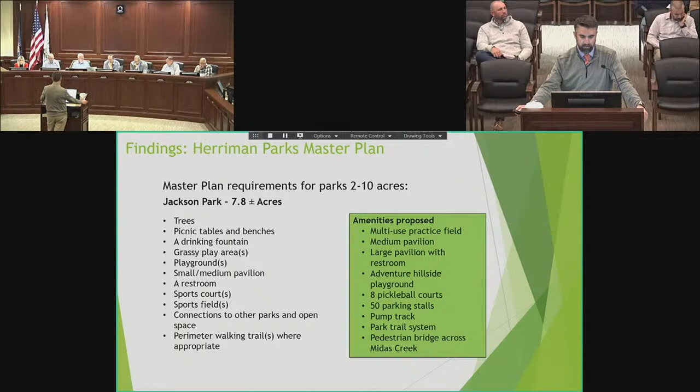As part of the master plan, there are requirements for parks given a certain acreage. All of these parks do meet those minimum requirements, and they probably exceed them a little bit as well. You can see the requirements on the left-hand side, and then the amenities in the green, fulfilling those requirements for Teton Ranch and Midas Creek as well.

So there was one topic of discussion just regarding the Jackson Park. Currently, it's providing 53 stalls, and the field that is there is currently only being proposed for a practice field and not for active games.

That is just based off of the problems that games can bring. If you have a field with lots of games, it brings lots of traffic, which is undesirable for the neighborhood. So currently it's being proposed as just a practice field.

This parking analysis shows that with that transition, you're going to need a total of 96 stalls during the transition from one game to another. Once the transition is over, you only need 57 stalls, and they're providing 53, which puts 4 cars potentially out on the street.

So with that being taken into consideration, these are some of the conditions that staff is proposing to allow for team play, because we know there's a need for that in the city, but we're trying to mitigate that higher demand of parking needs.

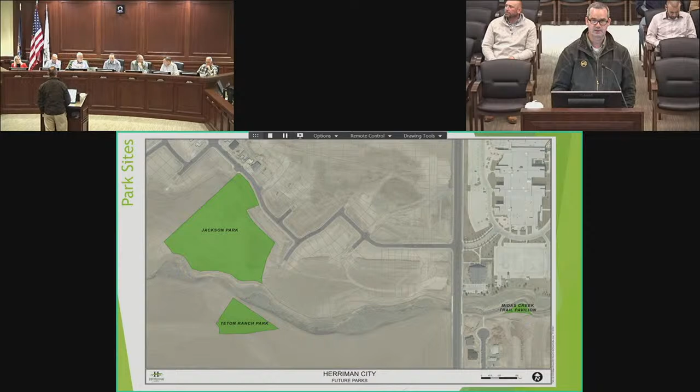Anyway, essentially the short answer is yes, there will be a pedestrian bridge connecting Jackson Park across Midas Creek to the trail system on the south side that would connect to Teton Ranch Park.

I was going to say, in your packet on page 195, there you go, there it is right there. So it doesn't connect directly with it, but it connects to the trail that goes to it. Yeah, so in this case there is a connection.

In this case, on Midas Creek, we actually have a trail on the north side, which is the southern boundary of Jackson Park. And we also have a double trail on the south side that's doubled with an equestrian trail that runs right by Teton Ranch Park. So the bridge will connect those two trails, thereby connecting the two parks together.

Since this is the only bridge I know in this area, unless you get up to the road, that's connecting the park with neighborhoods and the trail, how wide is that bridge going to be? We haven't gotten to that level of design yet, but typically those bridges are 12 feet wide.

Sorry, Rob, is it okay if I make just one quick clarification? I do believe that at least the scope of work the city is planning on doing, although the trail and the bridge are all part of this overall picture, is currently not in the scope of the city's work, and we're anticipating the developer will provide those improvements.

So they would kind of go in parallel, if that makes sense. We don't know all the exact answers to that, but the width, do you know the answer to the width? He said 12 feet, that's what he believes it was.

Well, that's a typical width for a pedestrian bridge like that. Standard, yeah, 10 to 12 feet wide. So you're not looking at anything wider, just a standard, right?

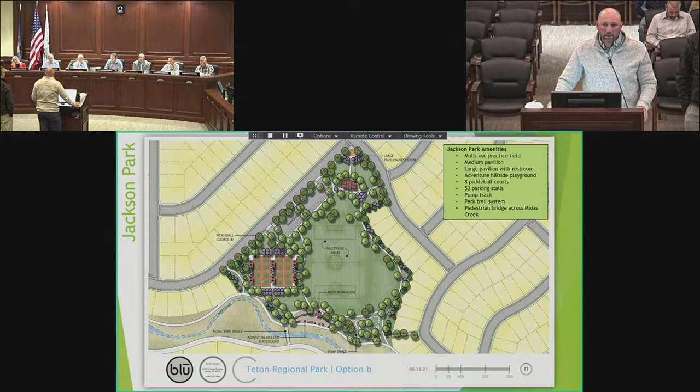We utilize a system called Civic Rec for all our reservations, and we would just program that into the system. So on this park, if anybody wanted to reserve it, it would either have a note stating that it requires 2 hours between reservations, or we would establish a schedule that would start, say at 4 o'clock, with blocks, maybe 2-hour blocks with a 2-hour gap, something like that. So we would utilize Civic Rec, our software that we're currently utilizing.

Yeah, to me, 30 minutes seems adequate. Where'd the 2 hours question come from? Again, I'm not exactly sure on that. I believe that maybe Sheldon, I think that was the number Sheldon pulled out. I suggested maybe an hour, and if you guys are okay with that, we would support it.

I think even 30 minutes might work. I see, I think a 30-minute gap you might have a little more overlap, and you get a team that usually shows up about a half hour early at least to warm up, so I think if you had an hour gap in there, that'd be sufficient.

Can I ask a question between you and Lawrence? So, because I'm looking at soccer, let's say they have soccer games scheduled or use of the field. Do they start practicing or doing stuff at 4 o'clock, at 5 o'clock? I assume there's no lights that are scheduled for this field, are there?

Yeah, and so we have limitations on lighting on the field, and so when would the blocks be okay? I mean, weeknights, you're gonna get one game. Really, realistically, I think weeknights you'll only get one game. It's the Saturdays where you can get a few games backed up. But, and I think an hour is good, because like I said, you'll have teams come 30 to 45 minutes for warm-up, sometimes even an hour, unfortunately.

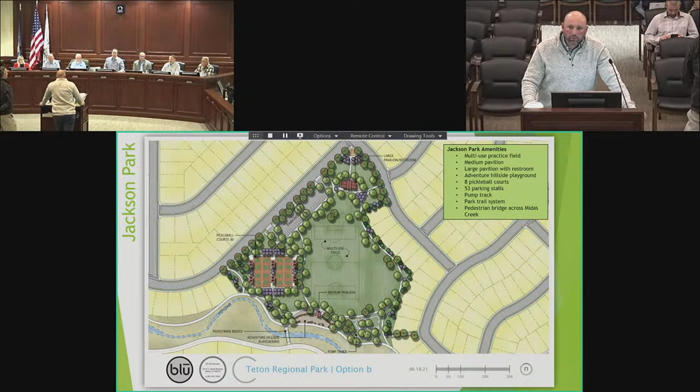For the time being, I think an hour—let's start with an hour and see what happens, then go from there. Yeah, okay, I'm good with that. I'll let you guys have a seat.

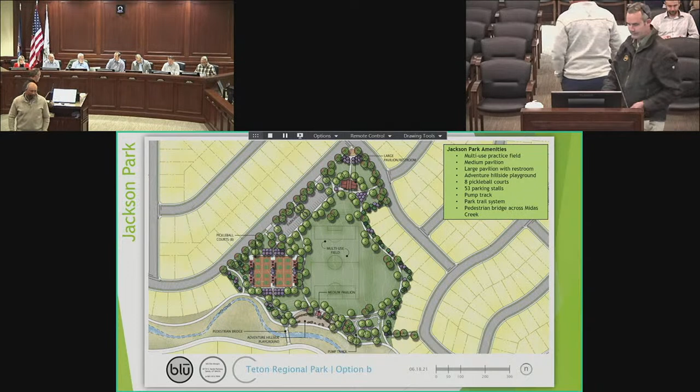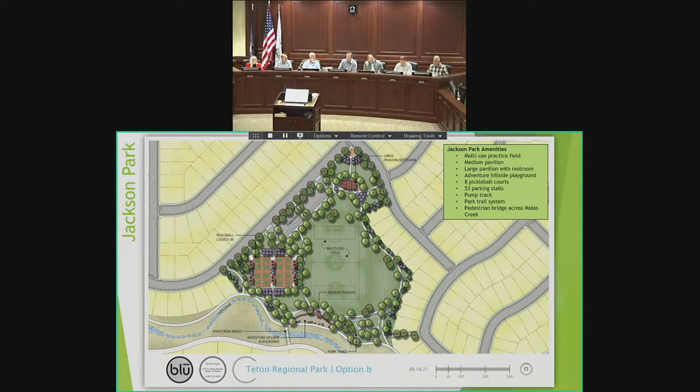Thank you. Any other discussion with the Planning Commission, or are we ready to make a motion? I think it looks great. I like it, I'm excited. Remember, there was just the one potential recommendation of changing from 2 hours to 1. That would be the only change. So there's 4 bullet points on the recommendation, right? Could you go to the recommendation page for us, please? Down a few slides. Right there, right? So then item 3 would have to change.

Okay, I'll go ahead and make a motion that we approve item 3.1 with staff's 4 recommendations, with a change to number 3 to allow all reservations exceeding 1 team shall have a minimum of 1 hour between games. Did we want to add reservations exceeding 1 team or 2 teams? No, it's exceeding 1 team, so that's games. Yeah, so if it's exceeding 1 team, it's 2 teams. It's just saying teams, if it's a game.

Motion made by Andy, seconded by Jackson. We'll call for a vote. Heather? Yes. Jackson? Yes. Andy? Yes. Brody? Yes. Lauren? Yes. And Daryl? Yes. Thank you so much.

Item 3.2, a request for approval of a subdivision amendment for the Village at the Boulders, Phase 3. We'll look at city staff for additional information. Okay, and this is on for a public hearing.

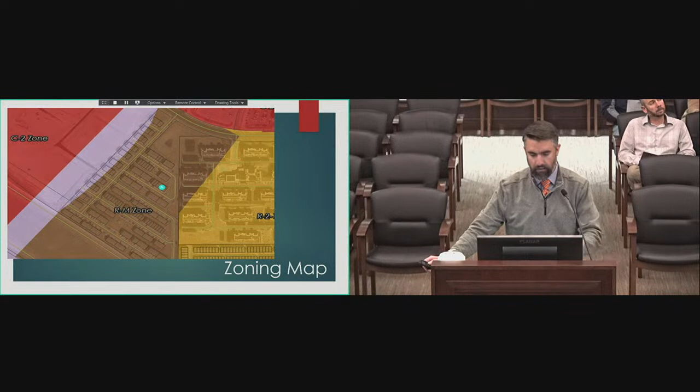Yeah, this is a subdivision. It's a very simple one though—something that will happen and nobody will know the wiser except for the people that decide to buy the units here. This is an existing subdivision just southwest of the Real Stadium. This is where the development currently is, and you can see where that letter A, highlighted, is—that's the units that will be subdivided. This is what they look like.

Front and back, so there's an existing sixplex. Currently it has 2 individual units that have been subdivided, and then the rest of the unit is combined into 1 unit, with 4 individual units in that one lot. So the applicant is just proposing to do the same thing done with the other 2, creating individual units for those other 4 units that could be for resale.

Obviously, nothing changes on the ground—nobody will even know the wiser. And the concerns with water utilities are null because they're already being serviced. So this is the existing plat—again you can see the 2 units that have already been platted off and subdivided. That is what will occur for the additional 4 units—units C, D, E, and F shown here on the plat. Those will all become individual units available for resale and ownership.

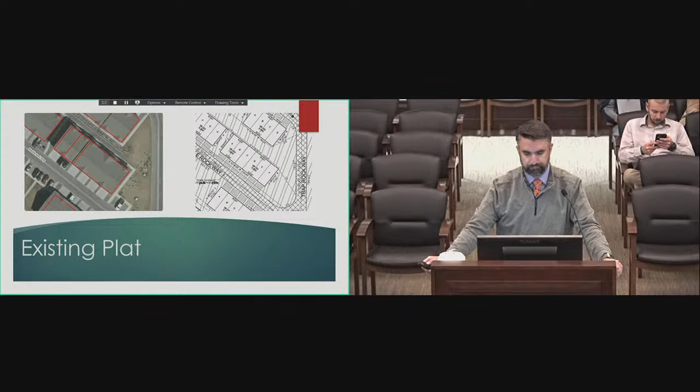This is the proposed plat here. In terms of ordinance requirements, there's not a whole lot for us to look at in this consideration—there are already existing buildings. The main consideration is just making sure the buildings have been constructed to be subdivided with those property lines in them, which our building department has looked at. We recommend approval for the proposed subdivision to create those 4 individual units. Any questions on that one?

No, thank you. Is the applicant here? Any additional information they would like to share? I'm guessing that's a no. All right, then we will open the public hearing at this time.

That's what I was thinking. And we'll close the public hearing at this time and turn to the Planning Commission for additional discussion or a motion to be made.

I'll make a motion to approve item 3.2, request approval of a subdivision amendment for the Village at the Boulders, Phase 3, at 14881 through 14889 South Marble Rock Way in the RM zone. Thank you, Heather. Motion made by Heather, seconded by Lauren. We'll call for a vote. Heather? Yes. Jackson? Yes. Andy? Yes. Lauren? Yes. Brody? Yes. Daryl? Yes. Thank you, guys.

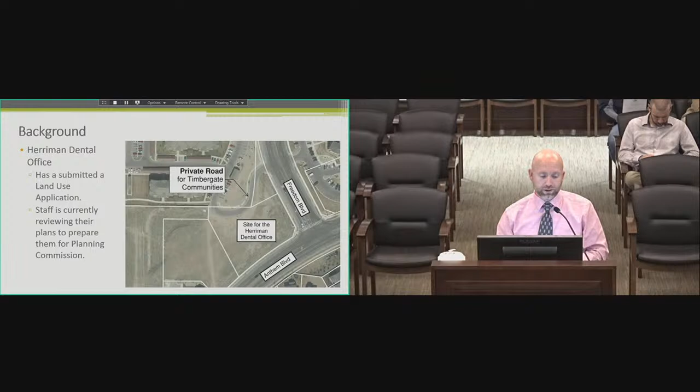Here at the top of Herriman City, at the intersection of Freedom and Anthem, we've currently received an application that's under review and will come to you once it's ready for your review. But an item we want to get through is the improvement along Springbok Drive, and they've come with a land use application.

They currently are proposing two locations for access. One, as you can see, is off Springbok Drive, which is the yellow corridor at top, and then a shared access that is off of Anthem Park Boulevard.

That Springbok Drive currently serves one property owner, essentially one community, and that's the Timbergate community. It's kind of hard to see, but there's a bold line that outlines the properties for this parcel, and Springbok Drive goes through the applicant's property.

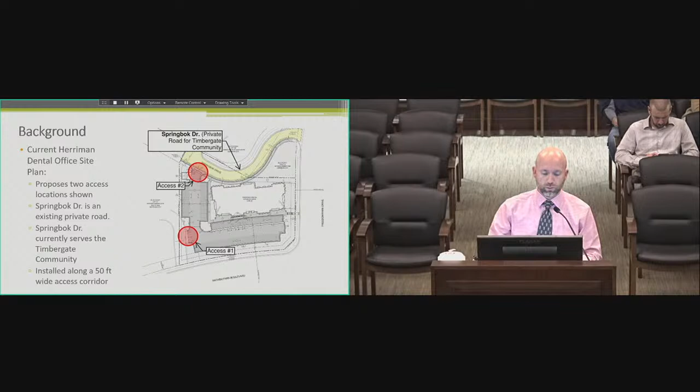It's put onto what we're calling the 50-foot wide access corridor, which is memorialized in this plat. It was a lot split, and as part of that they reflected it as 50-foot public access. On the books, we have not been able to find a formal easement outside of this. This is the most formal document we have that shows this public access, but otherwise, this is what that roadway is built on.

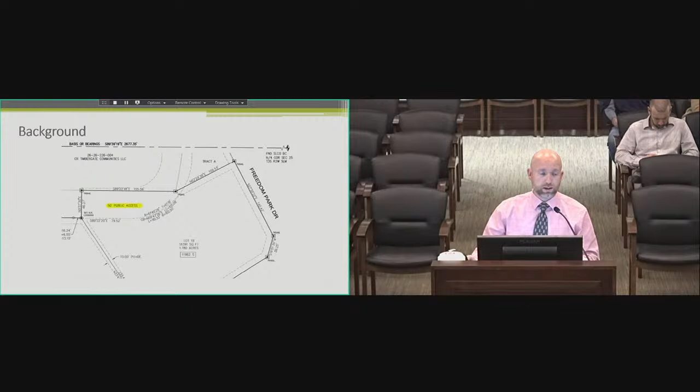It is improved on the north side, as you can see, on that Timbergate community. On the south side, it is not improved. So the engineering required as part of the application includes improvements along the south side according to the standard roadway cross-section.

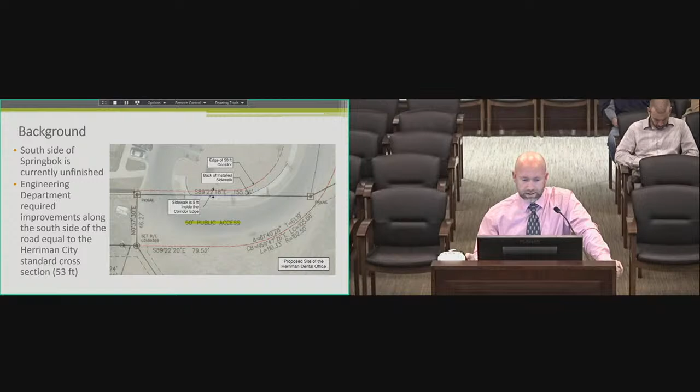The reason for that is City Code says that they'd be required to improve it and dedicate it. But of course, if it's not rationally related to the development, they would not have to complete it, nor would a fee in lieu be necessary. Right now, as the application stands, it does have an access onto Springbok, so our opinion is that improvements would therefore be required.

Also, in the city standard, it states—well, we just talked about it—that any modification to roadway cross sections comes to the Planning Commission for recommendation and City Council for approval.

Just a quick item to note, you can see in the aerial I superimposed that plat over the aerial, and you can see the improvements for some reason were shifted 5 feet south. It would have been nice to have those right up against that corridor edge to give us a little more real estate there, but that's how it was installed.

When we made this recommendation, even prior to it, they showed improvements of 11 to 13 foot drive lanes on each side. On your left is the Timbergate community, the improved side with a park strip and sidewalk. On the right is the applicant's side, which would include sidewalk right up against the curb and gutter. So that was the option proposed for our review.

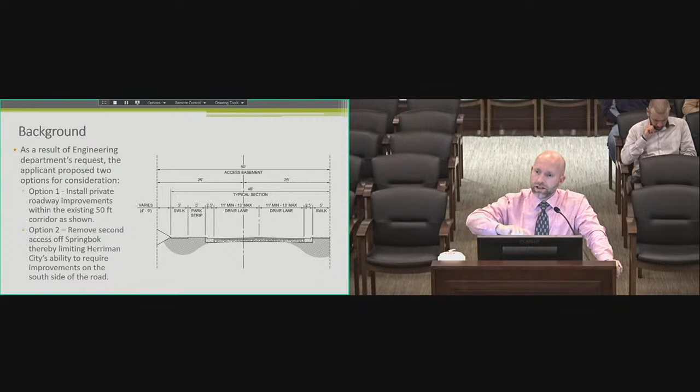The second option is that they would remove that access off of Springbok Drive, thereby limiting, to some extent, our ability to require the improvements on that south side—or at least removing their access into that—and it would only be through Anthem. So those are the options currently before the engineering department.

When those options were brought to us, the two things we look at are, first, level of service—essentially, does it meet the baseline requirements from a traffic standpoint—and then does it meet health, life, and safety? We lean on UFA, the Unified Fire Authority, quite a bit for that. So let's zoom in a little on the level of service.

That blue shaded area is another application currently under our review—a residential community that's pending, not approved. To be conservative, we assume that would be approved, so traffic counts would be up and they'd be using Springbok Drive. There's also a portion of the Timbergate community that would utilize Springbok Drive, as well as the dental office.

As we quantified that, we come up with an estimate of about 1,000 vehicles per day, whereas the capacity would be somewhere around 5,000. So we anticipate the level of service would be above level of service D, which is required. UFA's requirements currently require no parking on one side of the road for a section like this, so we would make that a condition of approval if this were recommended.

This is just a quick note we want to make. We have an application coming in from the property owner to the west. They'll be in a similar situation, and we wanted the commission to recognize it may have implications to that application, based on what is memorialized in this decision, as well as for City Council. I wanted to bring that to light as we're thinking through this.

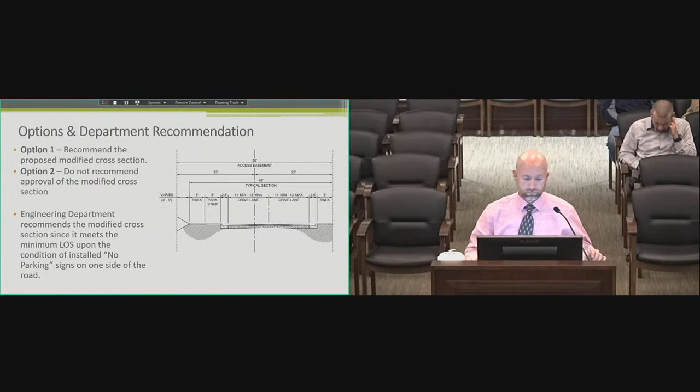Typically we require a precast wall between commercial and residential. Is that the plan on this one? Clint, would you mind speaking to that a little bit for me? Sorry, I caught you flat-footed. Typically we do require a precast wall between commercial and residential on purpose. The residential side would have to put in a wall along the perimeter of the blue area—that's typically what occurs.

In this instance, we have suggested that maybe a variance would be appropriate—a variance to not require the masonry wall between these two uses, just because if the dental office occupied the yellow space there, you've got a street, a large parking lot, and then you get to the residential neighborhood. So there's obvious buffering there that would not typically exist. For example, if a single-family home were right behind it, we would require the wall around the purple, blue, whatever. If that were a commercial use, then yes, we'd require it between them.

The reason I'm asking is, I'm very aware that if this is commercial with the dental office on the corner, this is a huge area for kids to cut through. Without a wall, you'll continue to have kids cutting through the parking lots on their way to the middle school—kids cut across this field every day. I'm not sure we want to remove that barrier, because then we force them onto the sidewalk, though they may still cut through on one side. But at least there's a barrier from them cutting through the commercial parking lot, because it will occur. There may be ways to limit that if we keep something separating it. That was my one thought.

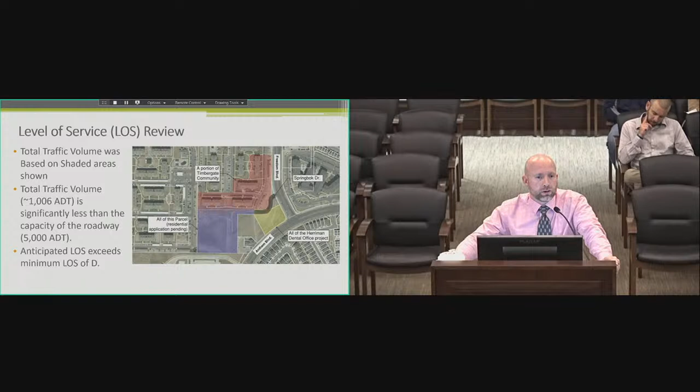So we wouldn't be so constrained. You could have a separate right and left turn lane if necessary at that point. This is just a tricky intersection area with traffic coming onto Freedom and then the turn coming off, because there's no light to dictate it yet. So people are turning pretty freely and quickly.

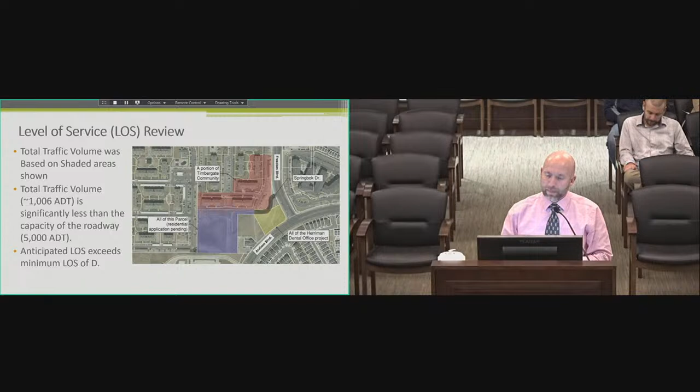And then also, the other concern I had is if we did require a precast wall, obviously it'd be on the south side, but then how would that look when we go over to the north side across the purple property? That's all I worry about, how that looks - it's all residential. I'm pretty sure we addressed that when we were originally looking at this.

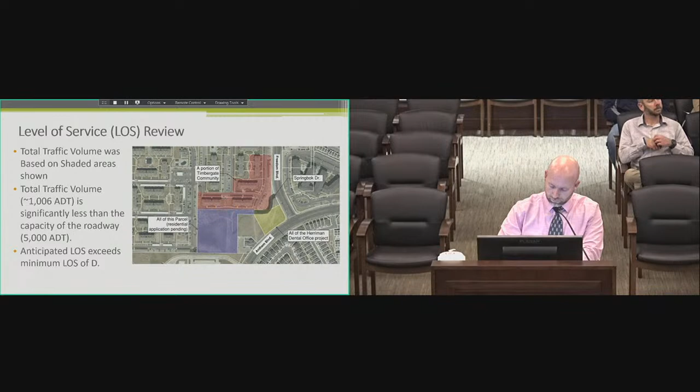We've had this discussion about the fence, and I want to say we included that in our motion, so I wonder if that's something we want to look back on, or if this is just to totally include a fence there. I think we were considering that there were going to be kids coming from the apartments to the school, and there's just a regular fence right now, and they've literally peeled it and opened it up to cut through.

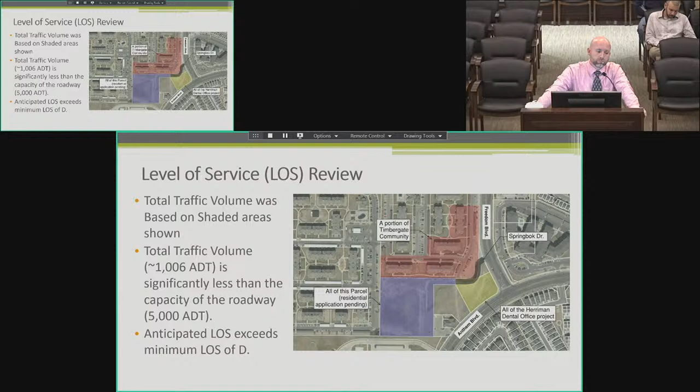We had discussed making sure that the purple property was going to be open, and there was a connection for the kids - they're gonna run through there anyways with the two access points. I don't see the need for a wall. I think while there is a safety concern with the view already and the accidents there, I think you're creating a safety hazard with the precast. I don't think it fits there.

Well, and it's a residential road against residential - you don't need the wall there. By code, it doesn't. I feel like... well, you're talking about the purple property.

That's right. Well, so a couple comments while I got the floor here. So the north-south line, of course you would need a wall along that. You got the little flag, the little stem that comes off - what's the width of that area? Are you going to be able to provide full width through that, or are you looking to match?

I've been calling it the throat, and maybe we're talking the same thing. So is it 46.27 right there? Yeah, there you go. So 46.27 is a little shy of the 53-foot cross-section, but what they're proposing would fit, if that's what you're asking, Andy. But it wouldn't be this modified cross-section you're looking at here.

What you're proposing for the typical section through this reach, would that continue to the west? Maybe that's the question. It could, if they have not - I would like to see only this little piece that's the issue. I'd like to have the park strip and sidewalk further to the west. This area is unfortunate that it's the way it is, but as you go further west, why not get it to the 53-foot standard cross-section? Yeah, I agree with that. Access number 2, I think somebody referred to this as a kind of a wanky road to begin with.

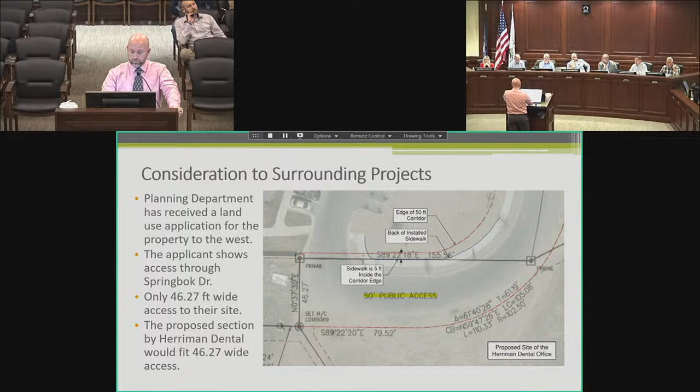Doesn't that create another issue with access number 2 coming into the north-south part of Springbok and then continuing west? Does it create safety concerns - a car coming south on Springbok trying to turn into that parking lot, kind of going kitty corner across the road? Let me check the animation to make sure I answer this right. So you're coming south on Springbok and you want to turn into access number 2 - you're kind of scooting across that intersection.

It's probably not the best thing - the offset between the drive approaches is what you're worried about? Yeah, I mean usually you need the two accesses, but it just puts it in an awkward spot.

I would qualify that the current situation we're at now is conceptual level only, but there could be an opportunity to look at that if that second access was needed, we could make a modification to have it line up - slide it west.

The other question I have, maybe not necessarily applicable to this particular development, but as residential's coming in, is one access enough for all those homes? From the one to Springbok west? Maybe that's not for this one, but they recently submitted an application for 30 units with one access.

One thought I also have - if we're potentially not wanting the precast wall, we could recommend to this landowner that they're required to pay for the extra turn lane on Springbok out, since we're taking away their need to put a precast wall in. That way we offset some of what we do - we give a little and we get in return what we think we may need, but we're not positive yet.

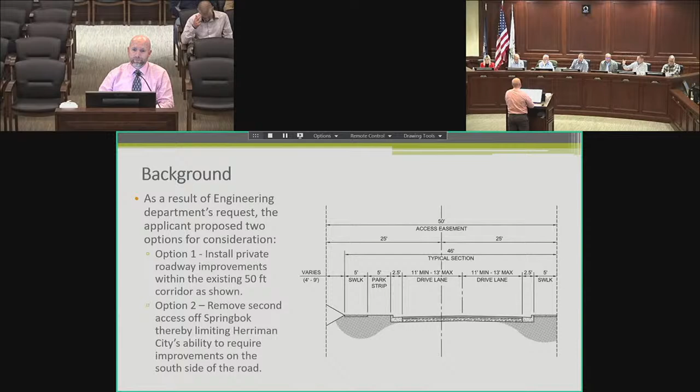I don't think we want a sidewalk there. Remember how wide that narrow piece is? 46.27. Yeah, the flag lot.

They have sent us the application, which I haven't looked at in depth. I do know there's gonna be a handful of requests for deviations to the standard, and I'll need to come to the commission. We can take a closer look at that time.

It looks like they could do it just like this, the sidewalk down with a park strip, because that's the same width right there. There's no way to get 5 more feet on that south side, they can't get a park strip. If you look at this, you'll see why.

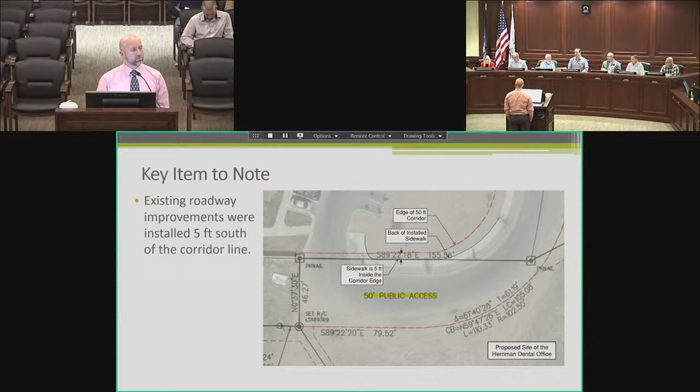On the north side, right? So just by way of information, the White Pine Dental that was approved just adjacent to this one, they will be installing a precast concrete fence along the borders where they're adjacent to that residential.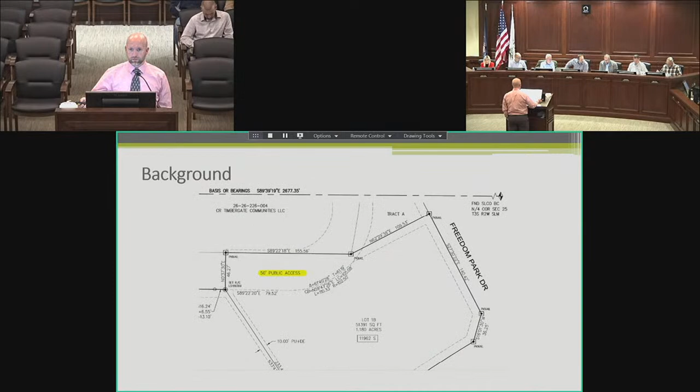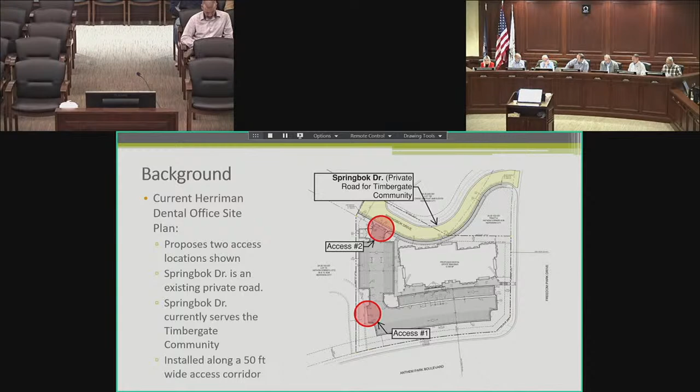I think I'm ready to make a motion. Make a motion for item 3.3, consideration of the modified roadway cross-section of Springbok Drive along the Herriman Dental Office project, going with option 1 with a modification that we make the sidewalk on the south side 6 feet instead of 5. I will second that.